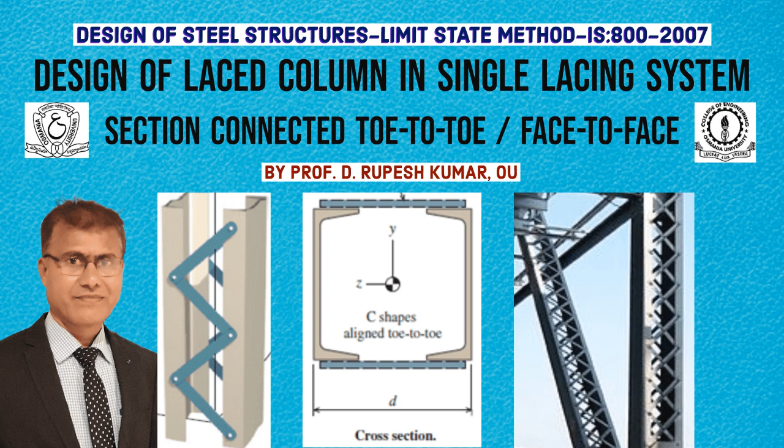In today's class we shall see the design of laced column in single lacing system wherein the sections are connected toe to toe or face to face, and we'll also see a problem on finding out the effective length of a column. In the previous class we saw the design of the laced column system in single lacing system wherein the sections were connected back to back, and also a problem on design of battened column wherein we designed the battening system for the built up column.

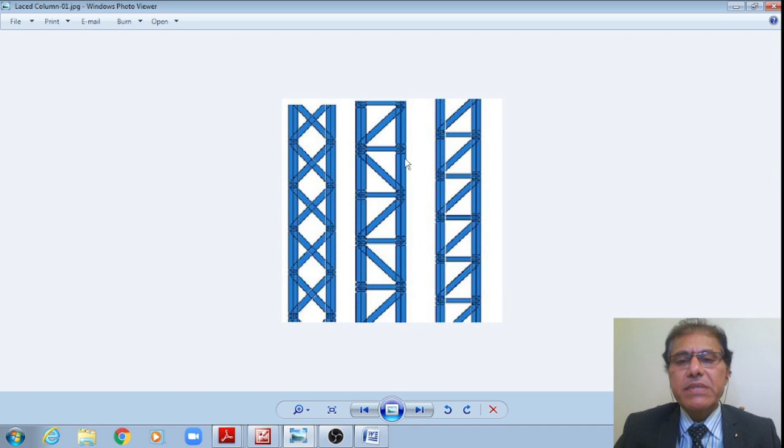Now let us move quickly to the topics we'll be discussing in today's class. The other day we saw a problem on single lacing system wherein the channels were connected back to back, with double and single lacing systems, as you have already examined. That is the problem we discussed the other day, where the channels were back to back and an intersecting single lacing system was designed.

However, in today's class we shall see the design with channels toe to toe, or face to face. This is our toe to toe or face to face configuration. This is the second problem for today. I hope what we are discussing today is now briefly explained.

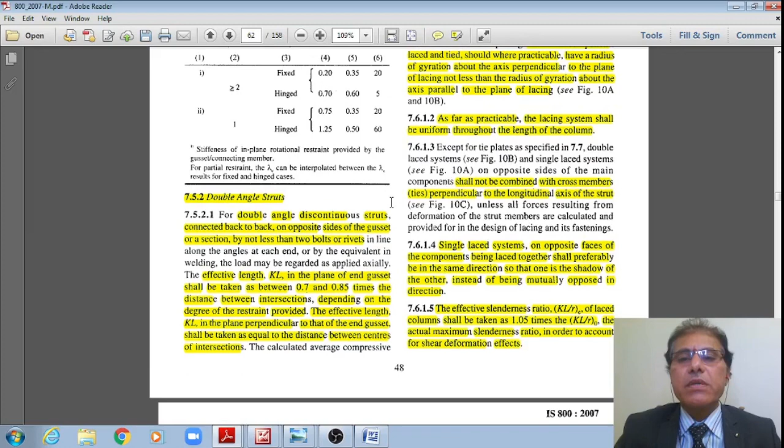Before we go to the actual discussion, let me briefly review the codal specifications of laced columns which I already discussed elaborately the other day. Let me go to page number 45, actually page number 48, of IS 800 2007, for the codal specifications for laced columns. We already discussed this elaborately and exhaustively, you just go through this. However, I'll give it in a nutshell.

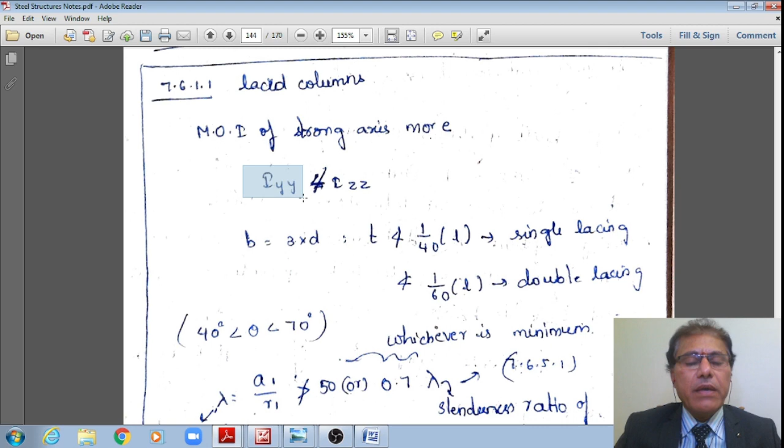In nutshell, the maximum slenderness ratio for these laced columns should be taken as 1.05 times the original slenderness ratio. Also, the moment of inertia about the strong axis IZZ should not be greater than IYY, or in other words, the moment of inertia about the weak axis previously will become the strong axis. Therefore IYY should not be less than IZZ, and similarly RYY should not be less than RZZ. Also, the width of this lacing flat should be 3 times the diameter of the bolt we are using, and the thickness of the lacing system for single lacing system should not be less than 1 by 40th of the length of the single lacing, whereas for double lacing system it should not be less than 1 by 60th of this length of the lacing, therefore this thickness.

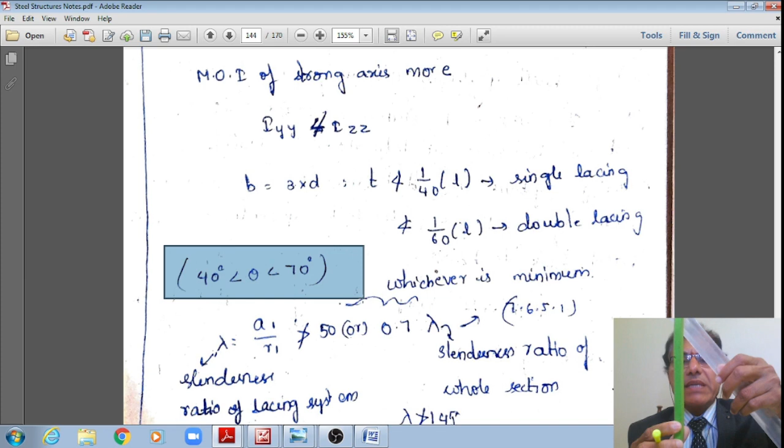This inclination theta with respect to the vertical should be greater than 40 degrees and less than 70 degrees. However, preferably it should be 45 degrees.

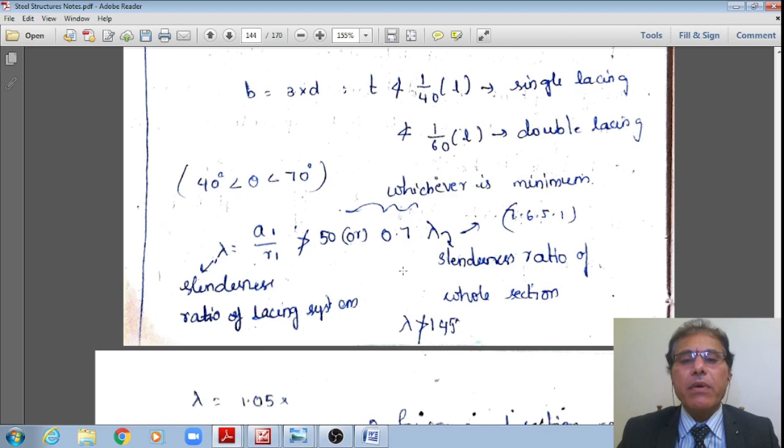The spacing, or pitch of the lacing, should be found such that the slenderness ratio of the lacing system should not be greater than 50, or 0.7 times the slenderness ratio of the entire built-up section as a whole, whichever is minimum, as per the codal specification.

Another codal specification says that the slenderness ratio of the lacing system should not be more than 145. These are the different codal specifications, students. I hope I have covered these in a nutshell. However, for elaborate discussions, you may go to the previous video wherein we have discussed that elaborately.

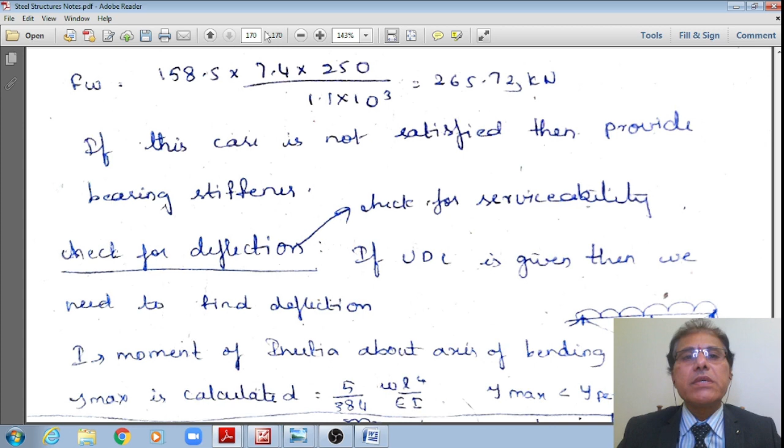Now let us see a numeric problem. I'll just go back to the problem we discussed the other day. This is how the problem we have discussed. Wherein the problem was like this. Just bear for a moment. Yeah, this is the problem.

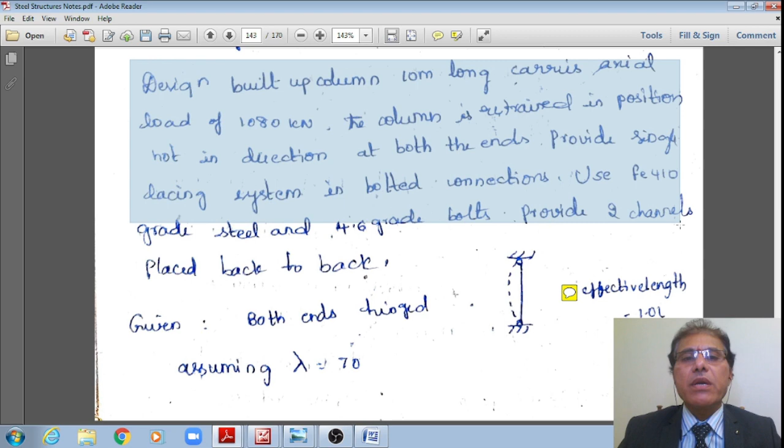Design a built up column 10 meter long, carrying an axial compression force of 1080 kilonewton. However, the column is restrained in position, not in direction, meaning it is hinged at both ends. Provide a single lacing system in bolted connections. Use Fe 410 grade steel and 4.6 grade bolts, meaning ordinary black bolts. Use two channels placed back to back.

Use two channels back to back, that was the previous problem. However, we already designed that. Now in today's class, I'll redesign this problem, wherein the channels are placed toe to toe, or face to face. That is the data given, student.

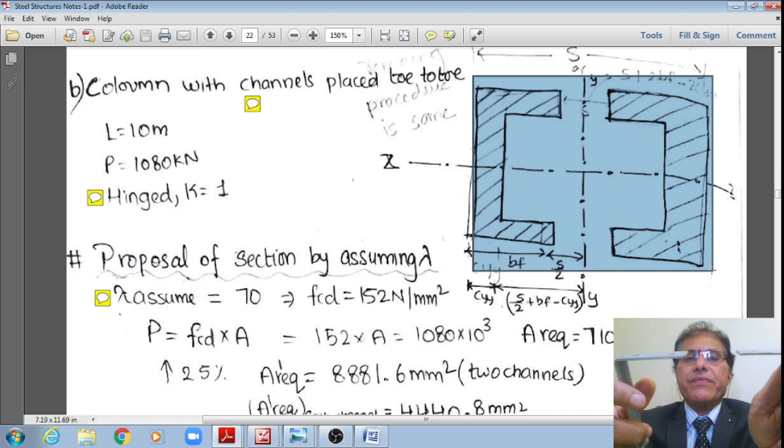Now let me go to the data given and what I need to do. This is how the two channels are facing each other, like I just showed. However, I need to find out the spacing between these two channels which are toe to toe, facing each other. Therefore, now I'll first propose the section.

Hence, if I go to page number 44 of IS 800, student, page 44, yes, 44, table 10, buckling class of the sections. Wherein for this channel, about any axis, the buckling class is C. Therefore I just note down that data: the buckling class is C.

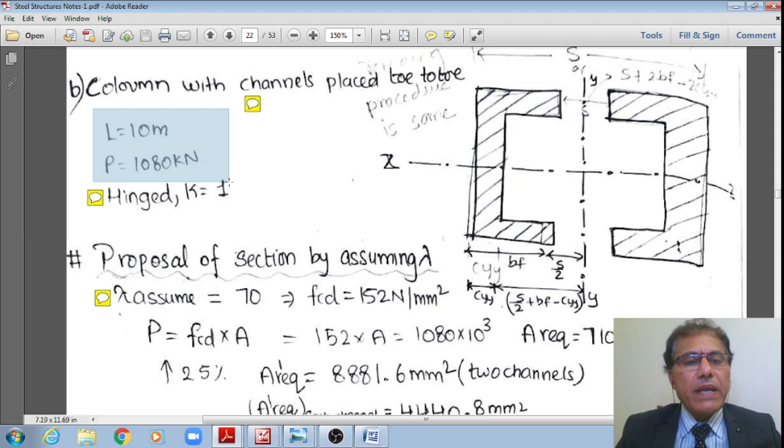For this problem, the given data is the length is given as 10 meter, and the load is given as 1080 kilonewton, already presumed to be factored load, student. This is hinged at both the ends.

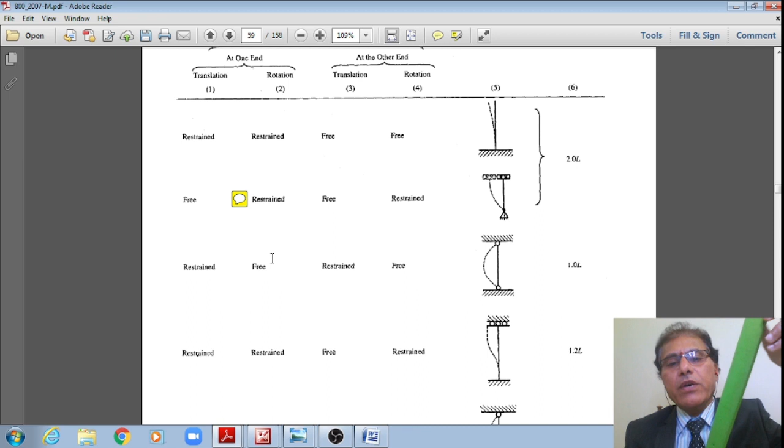Therefore, if I go to table 11 of IS 800:2007, page number 45, next page student, wherein it is restrained in translation and free in rotation at one end as well as at the other end, meaning it is hinged. Therefore, the effective length factor is equal to 1.

The effective length factor is 1, therefore I just note down that. Hence the effective length itself is the unsupported length. Now there is a first subheading, student.

Now what I'll do is propose a trial section for the built-up column like this. Therefore, to start with, keeping into the experience, I am assuming the slenderness ratio as 70.

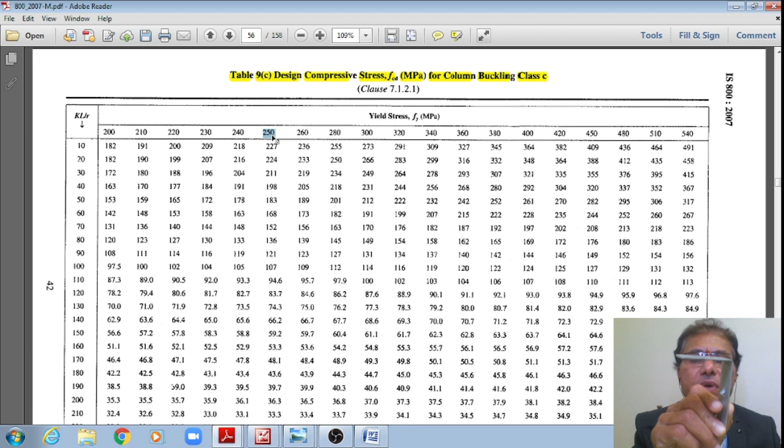Therefore, now what I'll do is go to table 9C. Let me go to page number 42 of IS 800. 9C, page 42, yes, I'm there in 9C. Therefore, for design compressive stress FCD for buckling class C, for Fy equal to 250, because the steel is given as Fe 410 grade steel, for which ultimate stress Fu is equal to 410 and yield stress Fy is equal to 250.

Therefore, for this 250 and for assumed slenderness ratio of lambda equal to 70, FCD, the design compressive stress, is equal to 152. Just noting down that parameter, student.

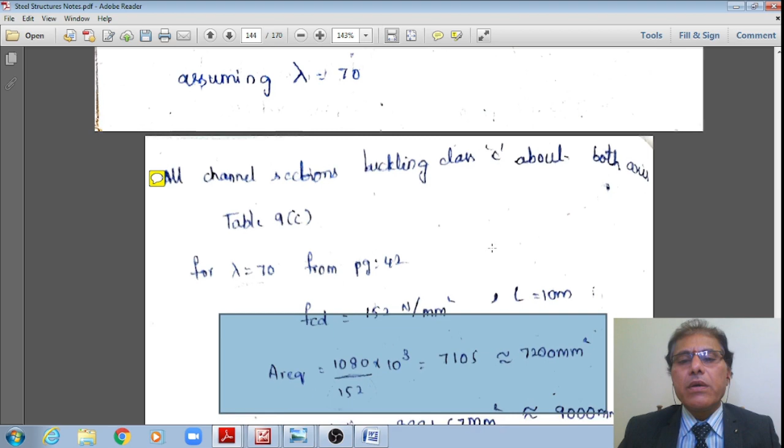Hence, the area required is A equal to 1080 divided by 152, which works out to approximately 7,105. However, for the trial section, since I am fixing a trial section, you increase this area by 25 to 50%.

As a student you may increase by 50%, but now I want to optimize the section, so I am proceeding with 25% extra. Hence it works out to approximately 1.25 multiplied by 7105, giving approximately 8882 mm square, or around 9,000 mm square. So the area obtained is approximately 8882 mm square.

Whereas we are assuming two channels, the area of each channel is approximately 4441 mm square. Therefore, now I'll go to SP 6(1), the Structural Engineering Handbook 1, Table 2, page number 6.

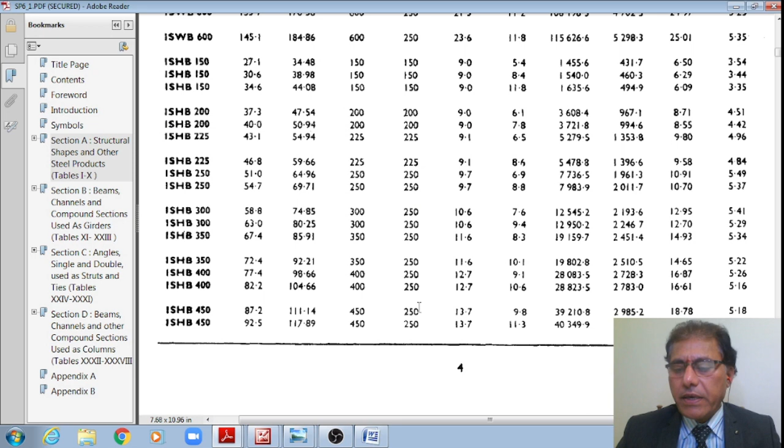From that, now I'll choose. Let me go to that section, student. ISMC 300. Bear for a moment. Therefore, this is ISMC 300.

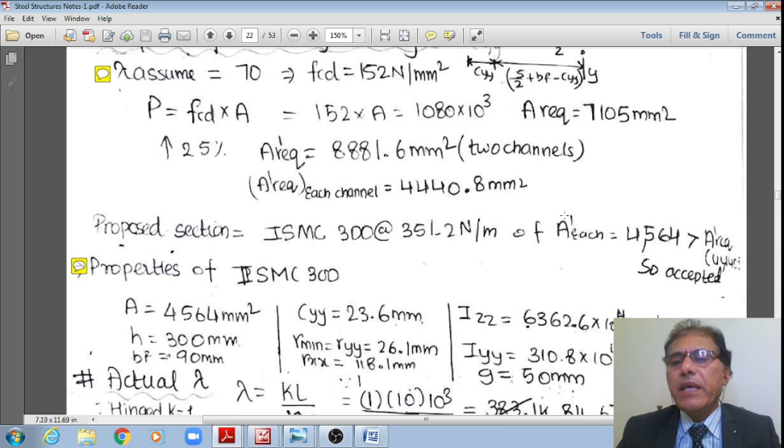I'm choosing this section, student, at the rate of 35.8 kg per meter, for which the area provided for each of the channel sections is equal to 4564 mm square. Even I'll note down the other relevant properties from this same table. This area provided, 4564, is much greater than the trial section area we are targeting, approximately 4441 mm square, so it should be okay.

I'll note down the other relevant properties from the table: area 4564, CYY equal to 23.6, moment of inertia about the major axis 6362.6 times 10 to the power 4, and moment of inertia about the minor axis 310.8 times 10 to the power 4, mm to the power 4. The depth or height of the section is 300 mm, and the width of the flange BF is 90 mm. RYY is equal to 26.1, and RXX is equal to 118.1. Out of these two, for an individual single section, R min is 26.1, and CYY is 23.6. That is the data noted from SP 6(1), page number 6.

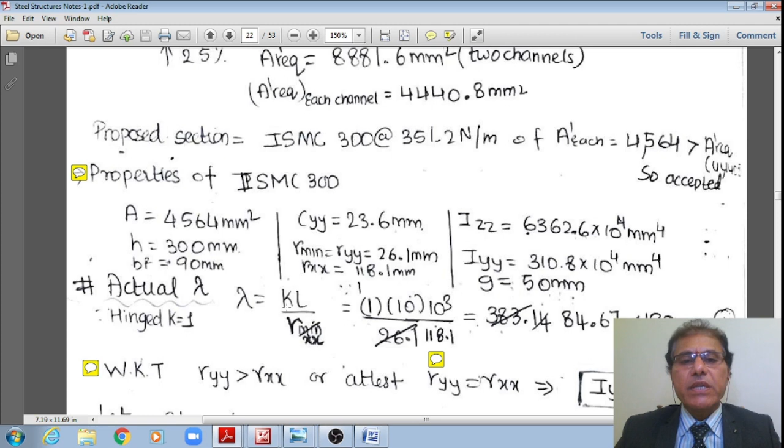Now, once I know this data, I'll proceed with further calculations. How now I want to find out this spacing, so what should be that spacing? However, the code says that for obtaining that spacing, I need to proceed like this.

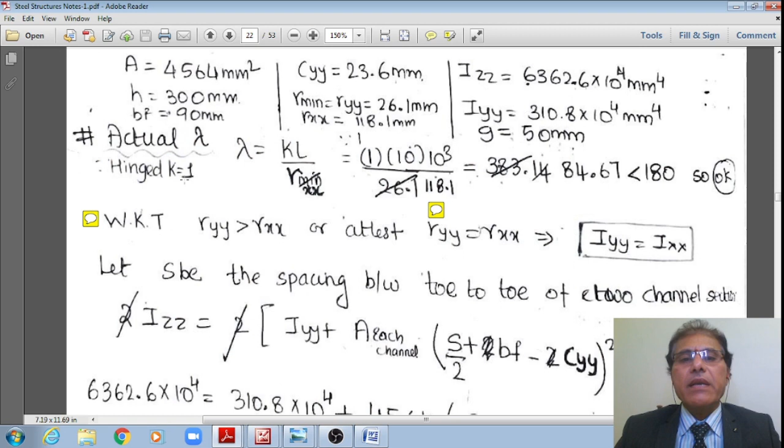Therefore, let me see this. Now, let us see this. The actual slenderness ratio of this built-up column is equal to KL by R. However, KL is equal to 10 meter, 10,000 mm, divided by R. However, please see that R min for the built-up section,

as per the discussion, we have seen that IYY shall not be less than IZZ, meaning RYY shall not be less than RZZ. Therefore, RZZ itself, RXX itself, is the minimum radius of gyration. Therefore, for the built-up section, RXX will be the minimum. However, for the built-up section, RYY will not be 26.1 because it is spaced at some distance apart; it will be maintained such that it is just greater than 118.1 or just greater than RXX.

Hence, for the built-up section, RXX is minimum. Hence, if I divide with that 118.1, not 26.1, please make a note, student. I will show that it is crossed out - no, don't do that. Using 118.1, it works out for the built-up section that the slenderness ratio is equal to 84.67, which is less than 180, so it is okay.

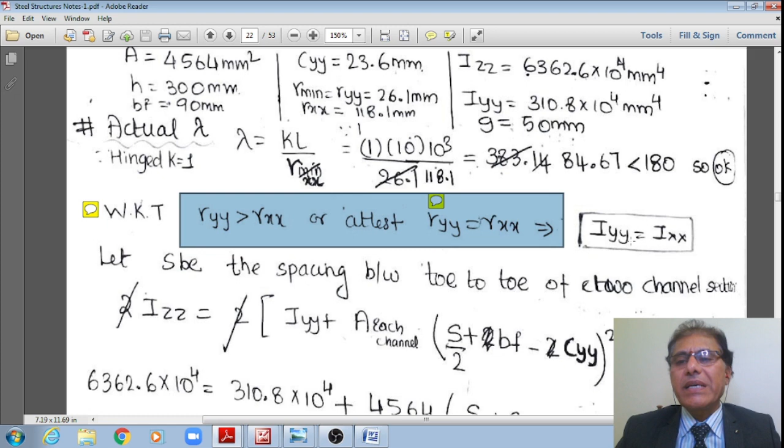Now, however, I want to find out - just now we have discussed that RYY should be greater than RXX and IYY should be greater than IXX. Therefore, I want to find out the spacing S between these two channels. Let S be the spacing between these two channels, which is the clear spacing, in terms of mm, which is the distance between the toe to toe of these two channels.

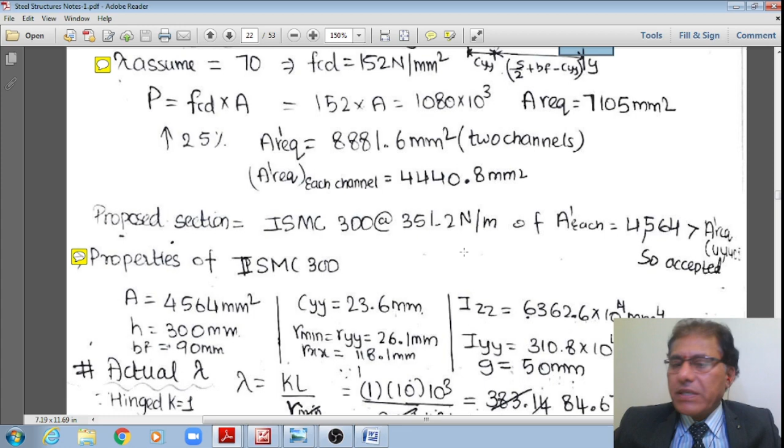I want to find out the spacing S using this condition that IYY should be greater than or equal to IXX. Therefore, if that is the case, the moment of inertia about the major axis for the built-up section equals 2 multiplied by IZZ, using the parallel axis theorem. The moment of inertia about the YY axis, the weak axis, equals 2 multiplied by IYY plus area of each channel multiplied by S by 2.

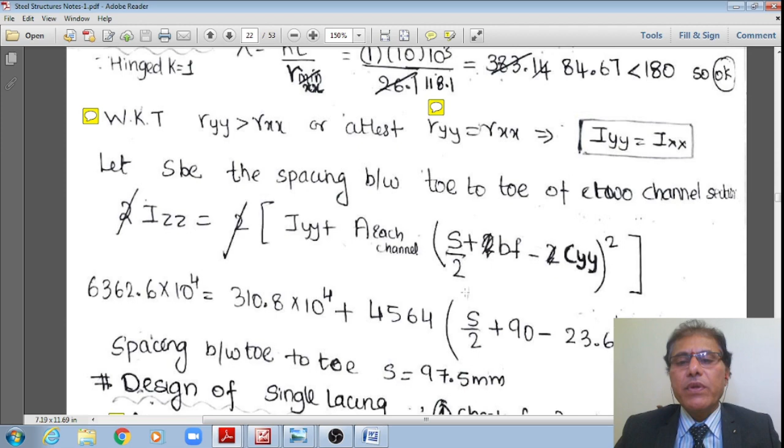S by 2 plus BF minus CYY, whole square. That is how the moment of inertia about this centroidal vertical axis is transferred to the centroidal axis for each of this column. Therefore, for two columns.

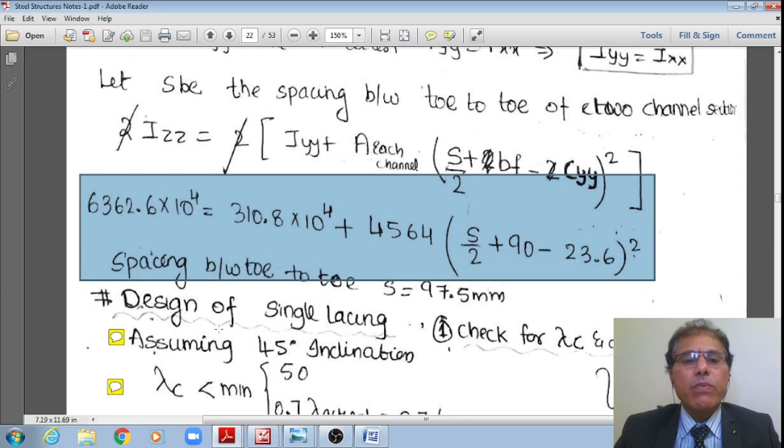Therefore outside 2, substituting the numeric values, the 2 gets cancelled. Hence substituting the numeric values, now I have 6362.6 times 10 to the power 4 equals 310.8 times 10 to the power 4 plus 4564 multiplied by S by 2 plus 90 minus 23.6, whole square. Solving which, I get the spacing.

Between these toe to toe is equal to 97.5. Now let us see this spacing. Now let me go to the further calculation.

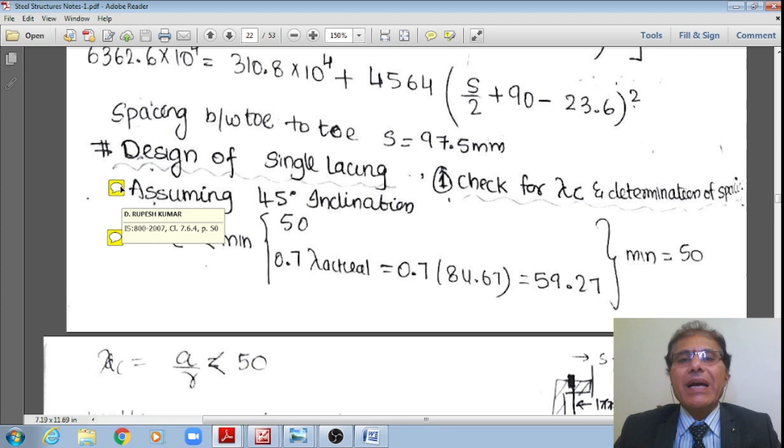Once I do this, now I want to design this single lacing. For that, assume the inclination of this lacing as 45 degrees.

As per clause 7.6.5.1, page number 50, we have seen that the slenderness ratio should be the minimum of 50 or 0.7 times the actual slenderness ratio. We already calculated 0.7 multiplied by 84.67, which works out to 59.27. Out of these two, the minimum is 50 only. Therefore it is okay.

Furthermore, now I want to find out the spacing. Therefore, the distance between the bolts, these two bolts, is this one. This distance equals, from this schematic, S plus 2 multiplied by BF minus G, because this distance is G from the steel tables.

Substituting the numeric values, S is already obtained as 97.5, plus 2 multiplied by the breadth of the flange, which is 90, minus this gauge distance from steel tables, which we noted down as 50. It works out to 177.5, which is the distance between the CG of the bolts to the CG of this bolt.

Now, once I get that distance, this is what I am drawing, that has 177.5. And now, however, the spacing should be obtained in such a fashion that A by R should be less than 50.

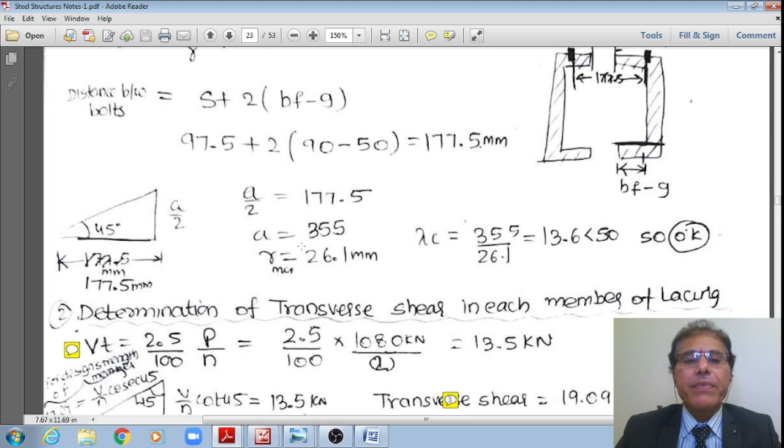355 mm. However, the radius of gyration for each individual channel equals 26.1. Therefore, if I check that, the slenderness ratio A by R equals 355 divided by, for individual channel, 26.1. Therefore, for this lacing system, the slenderness ratio equals 13.6, which is less than 50.

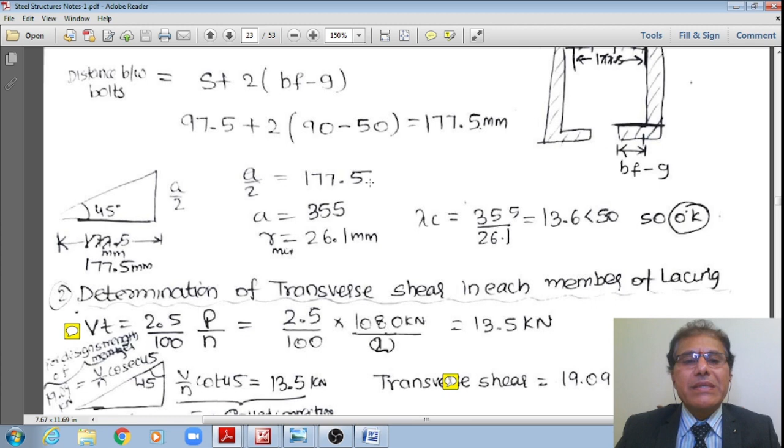Therefore okay, for this single lacing system it is okay. Once it is okay, now what I'll do is I'll further proceed with the design. Therefore I want to fix the section.

I want to fix the section. Hence now I'm determining the transverse shear in each of these members of the lacing. Therefore I'm calculating the design forces.

If I go to clause 7.6.6.1, page number 50, let me go to that page number 50 of IS 800. Yes, I am there on page number 50.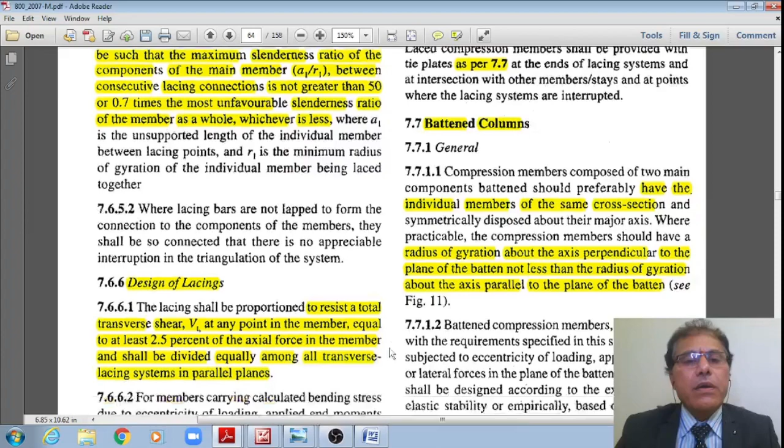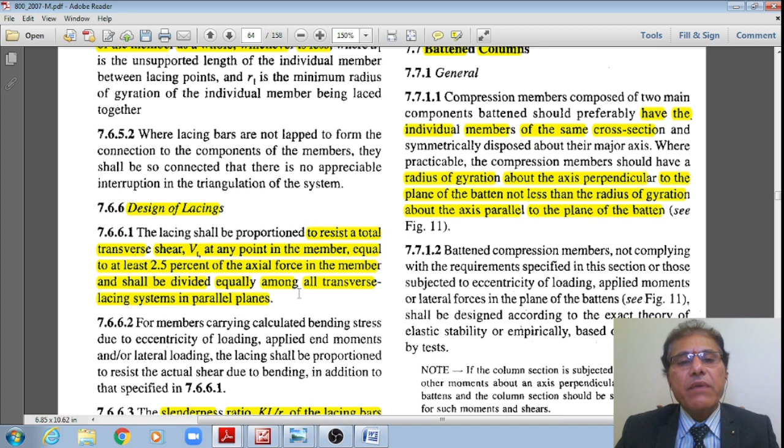As per this clause, code 7.6.6.1 says that the lacing shall be proportioned to resist a total transverse force Vt at any given member equal to 2.5% of the axial force in the member, and it should be divided equally among all the transverse members.

I do have N equal to 2. Just now I obtained this spacing A equal to 355, because this was A by 2, and this spacing was some 177. Therefore, this is how N is equal to 2. Two lacings back to back.

Therefore, that divided by 2 works out as Vt, transverse shear, acting in the horizontal direction, which is equal to 13.5 kilonewton. Now I have this transverse shear, 13.5, and here this is 45 degree.

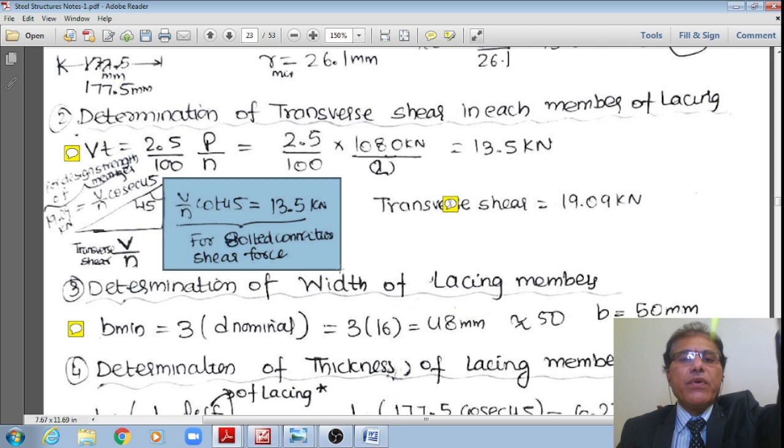Therefore, if I take, from this triangle, for bolt design, the vertical force due to this 13.5 kilonewton is equal to V by N cot 45. That I'll get as the shear force acting on the bolt system.

Once again, that works out because of this 45 degree, even the shear force on the bolt will also work out same 13.5 acting in the downward direction. Not only the transverse shear, also vertical shear works out as 13.5.

However, now I am interested in what is the design force in the lacing system, or the design compression force in the lacing system. From this schematic, we can say that the design force, once I know this as V by N, P by N.

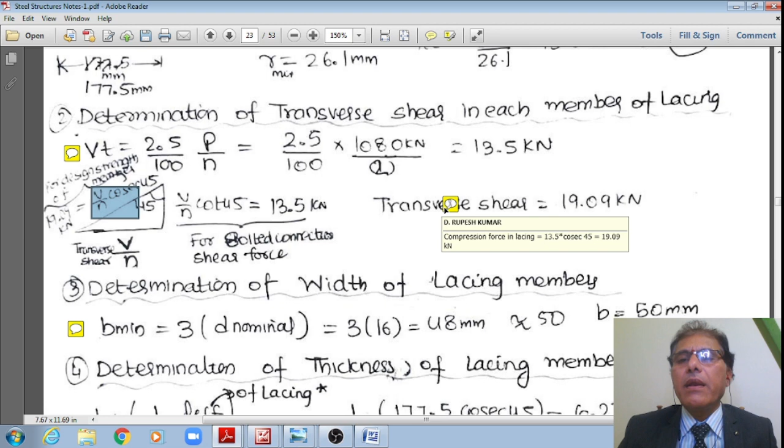By taking this, I'll get this design force in the lacing system as Vt by N, which is equal to 13.5 multiplied by cosecant 45. That multiplied by cosecant 45 works out to 19.09, so the compression force in the lacing is equal to 19.09.

19.09 kilonewton. Also, under reversal of stresses, it will also carry the same tension force, 19.09 under reversal of stresses cases. Now, once I decide the design forces, let me go to the fixing of the size. Next subheading is how to fix the size.

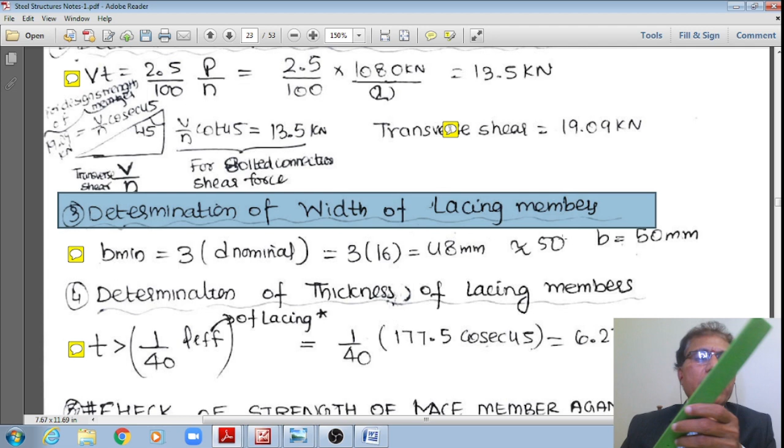Within that, the first subheading is determination of the width of the lacing member. As per clause 7.6.2, page number 50, 762, let me go to this page number 50, 762.

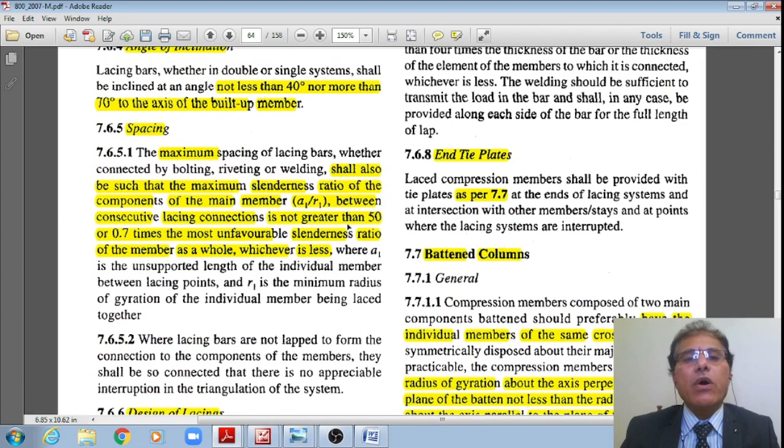Now I do have the core size. This you already seen, even this angle also we have seen. Yes, this one, 762, width of the lacing.

Minimum width of the lacing shall be 3 times the nominal diameter of the end bolt or rivet, and the thickness of the lacing shall not be less than 1/40th of its effective length for single lacing system. If I am recalling these two codal specifications and substituting the numeric values here.

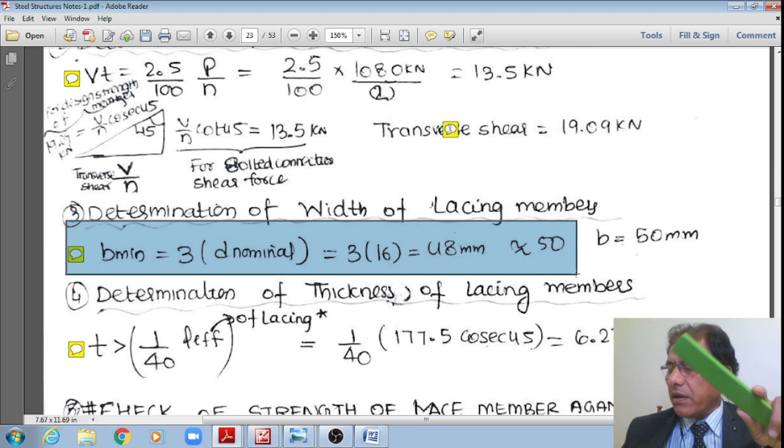The minimum width B minimum is equal to 3 times nominal diameter. However, I am assuming the use of 16 mm nominal diameter bolts. Therefore, 3 multiplied by 16 is equal to 48, so I will say 50 mm is the width. I am assuming as 50 mm, not less than means 50 mm.

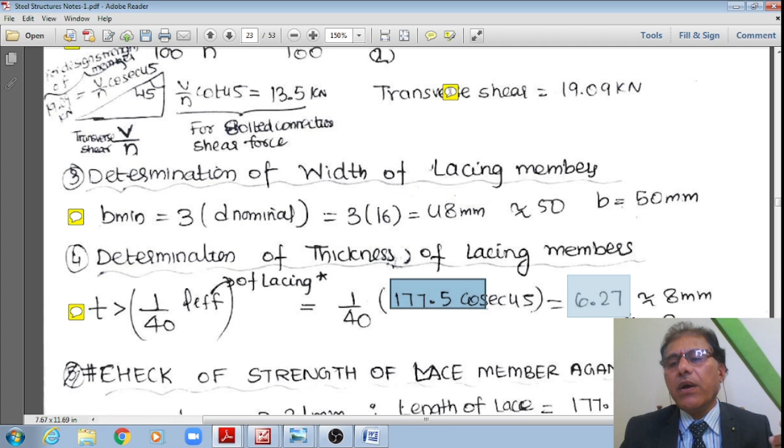Also the thickness, as per this, should be not less than 1/40th of this effective length. The length of this lacing system is equal to square root of 177.5 squared plus square root of 177.5 squared. Upon substitution, 1/40th of that value works out to 6.27. However, the thickness next available is 8 mm.

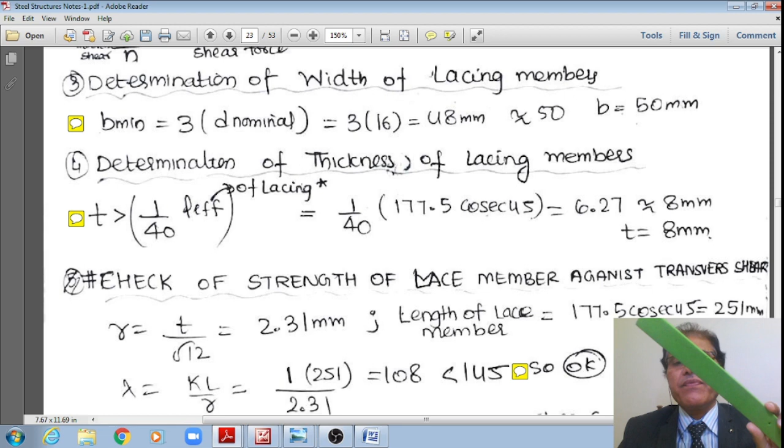Therefore R say 8 mm, right? Then, therefore, now I am fixing the section as 50 ISF 8. If I go to Indian Standard Flats, 50 ISF 8 is available, that section is available, right? Therefore, I am fixing that as my lacing system.

Now, once I fix this lacing system section, the next subheading is that I want to check the adequacy of the member against the applied design forces. Is it going to carry the compression force as well as the transverse shear or not? That I'll check.

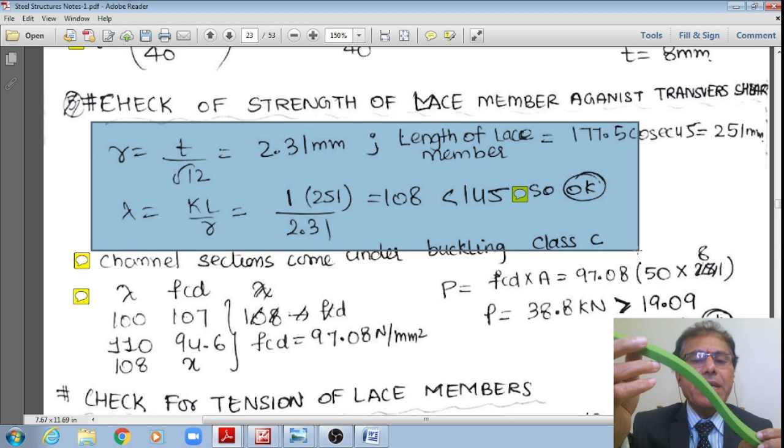Because under compression it is buckling, means bending, therefore the minimum radius of gyration is about the weak axis. That now works out T by root 12, because that is equal to square root of I divided by A, whereas I is equal to BT cubed by 12, whereas area is equal to BT. Therefore BT gets cancelled, therefore square root of T square divided by 12 will work out T divided by under root 12. Therefore thickness is already 8 mm.

Therefore 8 divided by square root of 12 works out, say, the minimum radius of gyration of this compression lacing, which is acting as a compression member, is 2.31.

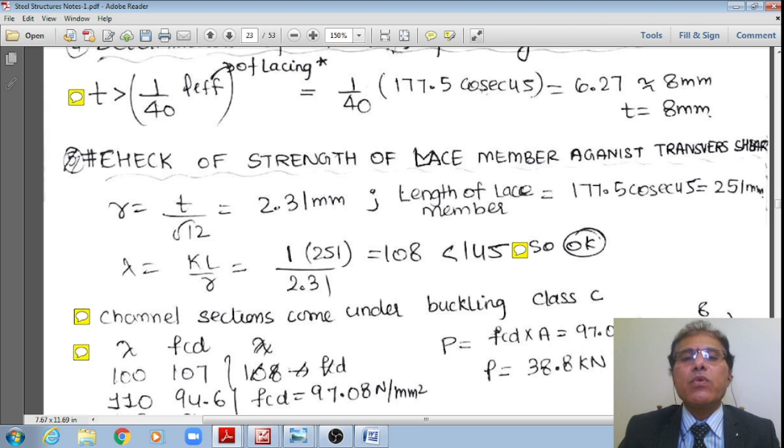And also the length of this lacing system, just now we have obtained as square root of 2 multiplied by 177.5 whole square, that works out say 251, right? That 251 divided by 40 itself worked out 6.27 as the thickness, right?

And now using this, I'll get the slenderness ratio is equal to KL. However, that length is equal to 251, and I'm assuming that both ends are hinged. Hinged, not more than one bolt, therefore effective length factor K is equal to 1. Therefore in such case I can assume not more than one bolt means hinged. Therefore 1 multiplied by 251 is the actual length, or between center to center of the bolts.

That is 251 divided by R min. R min is equal to 2.31. It works out say 108 as the slenderness ratio, which is less than 145 as per clause 7.6.6.3.

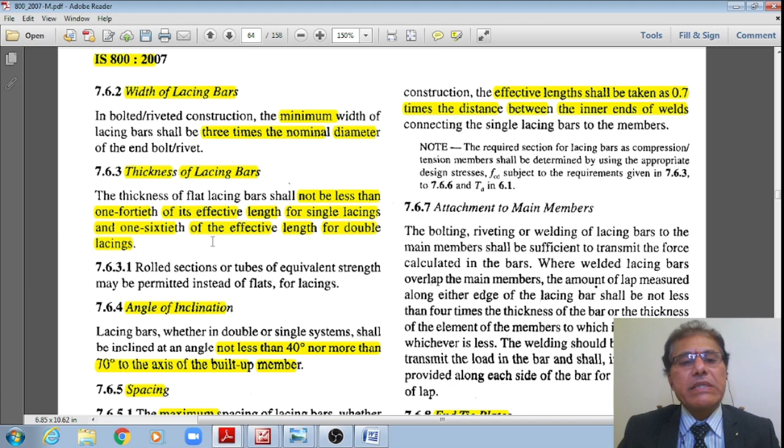Now let me go to that clause 7.6.6.3. Yes, as per this, now you can see - this one, right - the slenderness ratio of the lacing flat shall not exceed 145. This we already seen the other one, right, 0.7 times that for double lacing. Therefore it is less than 145.

Therefore, okay, this section is okay, this proposed section is okay from the buckling point of view, or from compression point of view. However, I'll also calculate what is the load carrying capacity of this section. Hence this section is a channel section, therefore which is buckling class C.

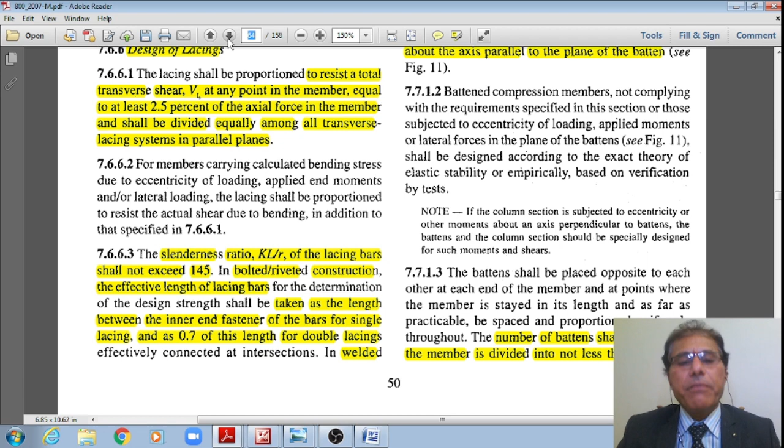Hence from this table 9C, page number 42, now I have to check this slenderness ratio of 108. Let me go to that page number 42. Yes, I am there in that table 9C.

Therefore now my slenderness ratio is worked out as 108. Therefore what now I'll do is I'll note down the value of FCD for slenderness ratio 100, which is 107. And also the next value for slenderness ratio of 110, the FCD is equal to 94.6, from this table, for Fy equal to 250. Therefore I have noted down these two values.

Therefore now in between I'll interpolate. Upon interpolation I'll get this design compressive stress as 107 minus 94.6 divided by 10, multiplied by 8. It works out say 97.08 Newton per mm square.

Therefore the load carrying capacity of this lacing system is equal to effective area, 50 multiplied by 8, multiplied by FCD which is 97.08, that divided by 10 to the power 3. It works out say 38.8 kilonewton, which is much greater than the design forces we already obtained.

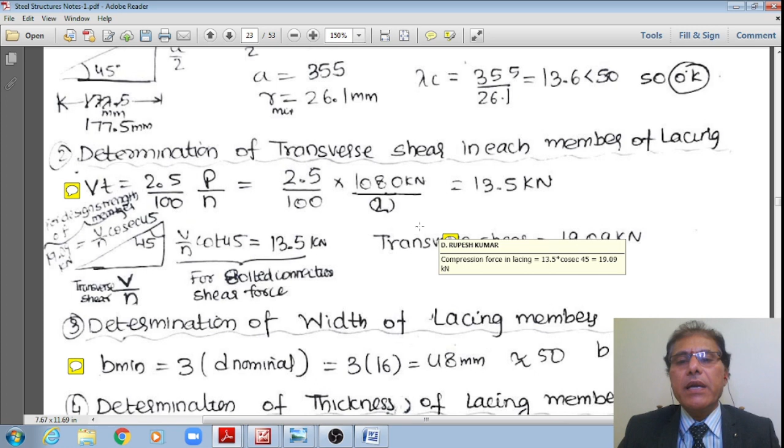Therefore that is how the compression force in the lacing system is equal to 19.09. Under reversal of stresses cases, the same is the tension.

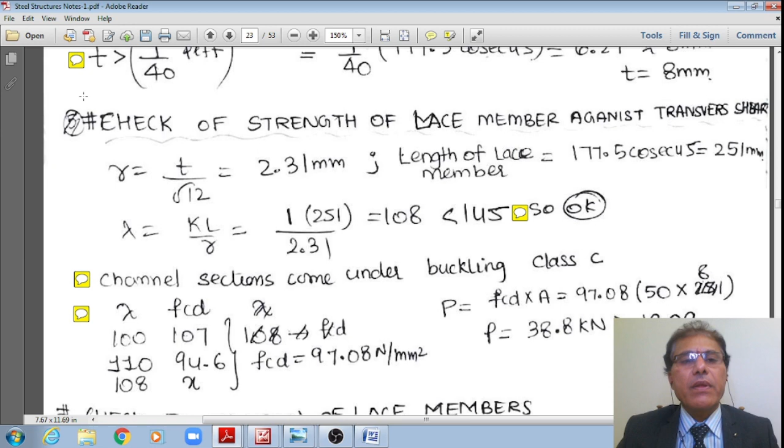Therefore, 38.8 is much greater than 19.09 kilonewton. Therefore it is okay, meaning the section is adequate to take the compression force.

However, whether it can take this much tension under reversal of stresses cases or not, I also need to check. Hence the next step is checking the adequacy of the section to take the tension force in the lacing system, the lacing flat.

Indian standard flat. Let me go to clause 6.2, page number 32 of IS 800, right?

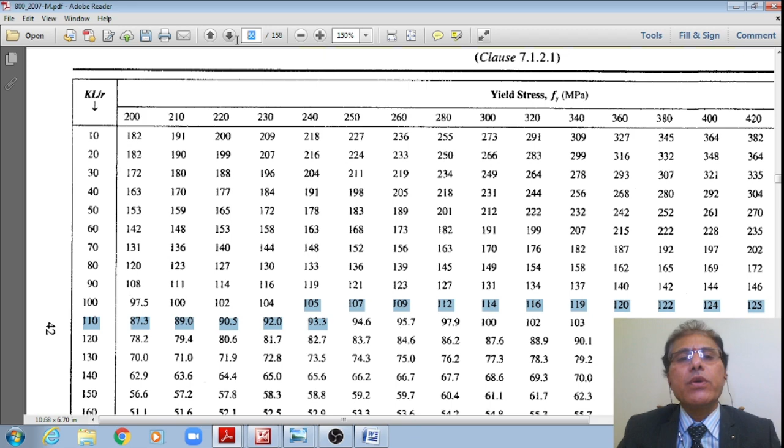In the design of tension members, T must be less than TD, where TD is the lowest of three values.

One, design strength due to yielding of the gross cross section, TDG. Two, rupture of the critical section, TDN. Third, block shear, TDB. However, block shear criteria will not come into picture here, so it is the least of the two.

As per clause 6.2, design strength due to yielding of the gross cross section, TDG, equals AG Fy divided by gamma m naught. The second criteria is design strength due to rupture of the critical section of the plate — this Indian standard flat is treated as a plate — so TDN equals 0.9 AN Fu divided by gamma m1.

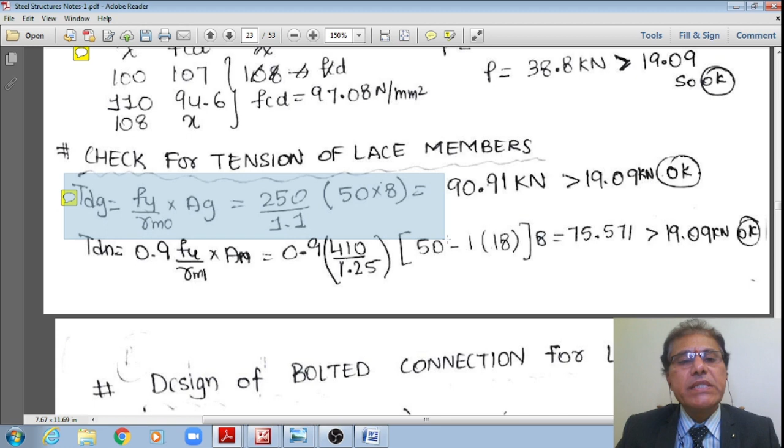As per these two codal specifications, I calculate first the yielding of the gross cross section, TDG equals Fy divided by gamma m naught, AG. For the steel, Fy equals 250 divided by 1.1, and the gross area of this lacing flat is 50 multiplied by 8, divided by 10 to the power 3. It works out to 90.91 kilonewton in gross cross section yielding, which is much greater than 19.09 kilonewton.

Now, also because we are providing one bolt hole like this, the area at this hole over the width of 50 will reduce by one hole.

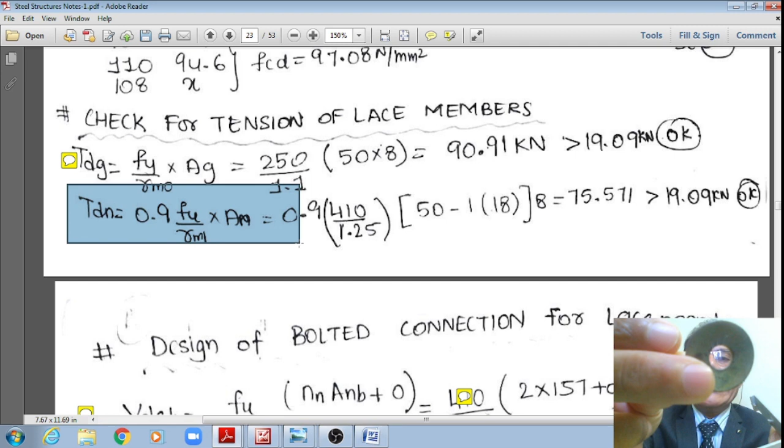As per this, for a 16 mm diameter bolt, the increase in hole diameter is 2 mm. Therefore 16 plus 2 equals 18. Now the effective width is 50 minus 18, one diameter of the hole, and that is the effective width, multiplied by its thickness of 8.

Therefore that is the net area, multiplied by 0.9 times Fu, 410, divided by 1.25, divided by 10 to the power 3. It works out to 75.57, which is also greater than 19.

However, the tension capacity is the least of these two. Therefore the least of these two, 75.57, is the tension capacity of this lacing system or lacing flat, Indian standard flat.

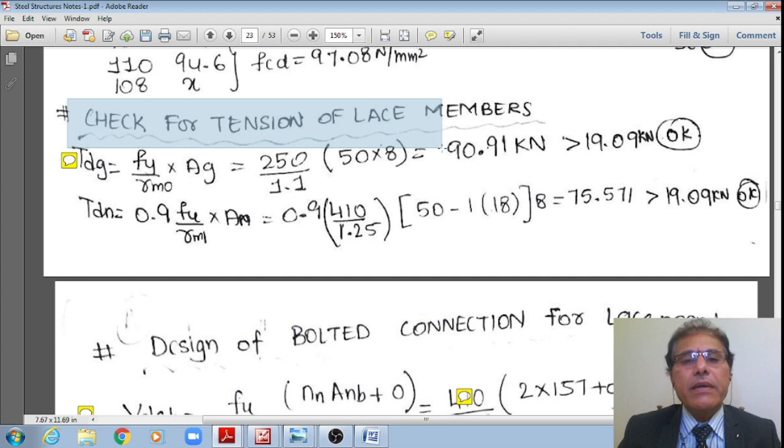Therefore, 75.57 tension capacity is much more than what's needed, since under reversal of stresses cases only 19.09 kilonewton can be expected. Therefore it is okay — it can take 19.09 kilonewton compression as well as tension. Hence my final section is 50 ISF, Indian standard flat 8, as the final section for the single lacing system.

Now, once I conclude that, let me go to the next subheading: the design of the bolted connections for this built-up section with single lacing system.

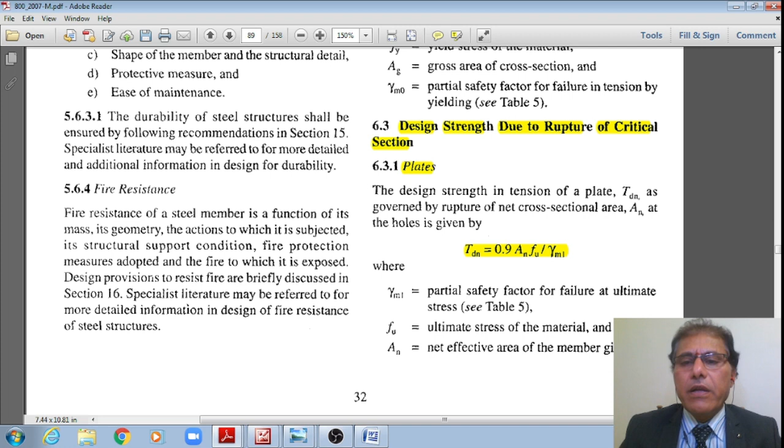Let me go to clause 10.3.3, page number 75. Let me visit that page. Yes, therefore I am there in the bolted connections section as per IS 800 2007, clause 10.3.3.

Shear capacity of the bolt, VDSB, equals VNSB divided by gamma MB, where VNSB equals Fu divided by root 3, Nn multiplied by Anb.

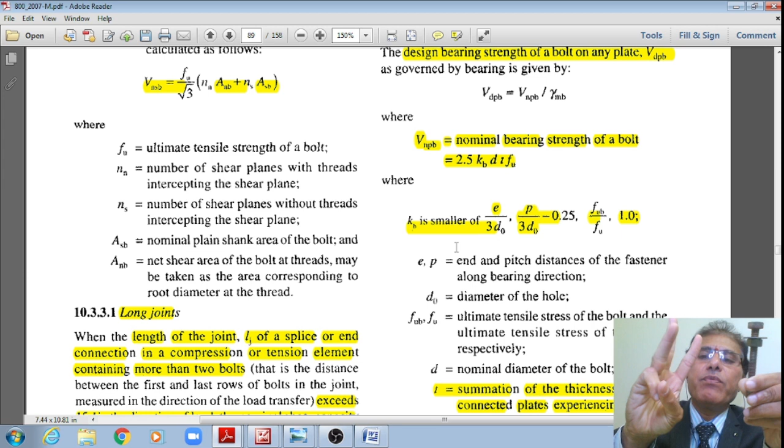The second one is the bearing capacity of the bolt, VDPB equals VNPB divided by gamma MB, where VNPB, the nominal bearing strength of the bolt, equals 2.5 kb dt Fu, where kb is the least of four values: one, e divided by 3D naught; two, p divided by 3D naught minus 0.25; three, FUB divided by Fu; and four, 1. Now let me substitute into these at a quicker pace.

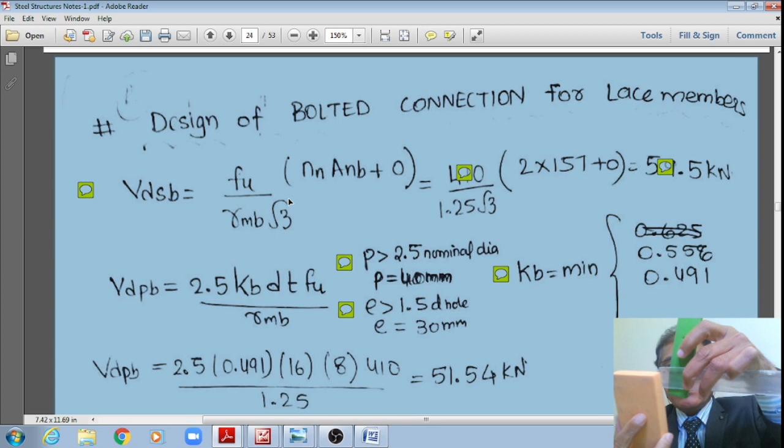Therefore, the design shear strength of this bolt — you please see that we are providing an overlapping lacing system, like this. Therefore these are under double shear, because one shear plane is between the two lacing overlappings, and one more shear plane is with the section. Therefore it is under double shear.

Therefore Nn is equal to 2.

Let me show this in the schematic. I'm providing an overlapping like this. Here one shear plane, and between these two Indian standard flats, there's one, and one more is there between this Indian standard flat and the channel section. Therefore it is under double shear. Once you understood that, I hope you understood that. Therefore nn is equal to 2.

Substituting the numeric values, now I get this result as 400 divided by 1.25 divided by root 3, multiplied by 2, multiplied by 157. It works out so a value of 58.01 kilonewton in double shear.

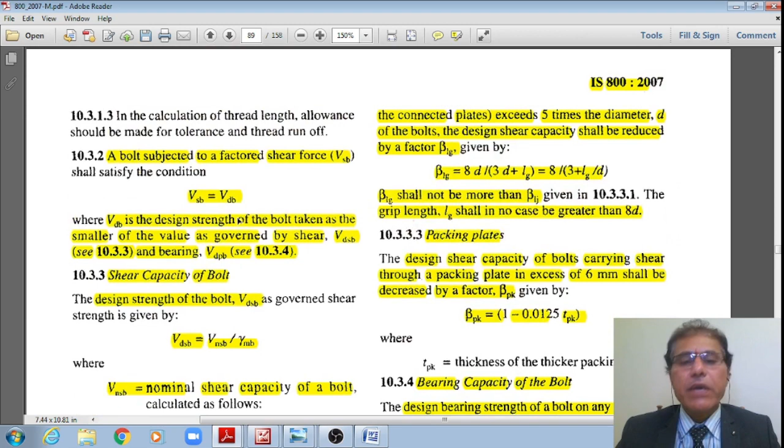However, if I want to calculate the strength of the bolt in bearing, then I need to find out what is the pitch. As per clause 10.2.2, page number 73, let me go to that page and revisit it at a quicker pace. The minimum pitch as per this shall not be less than 2.5 times the nominal diameter.

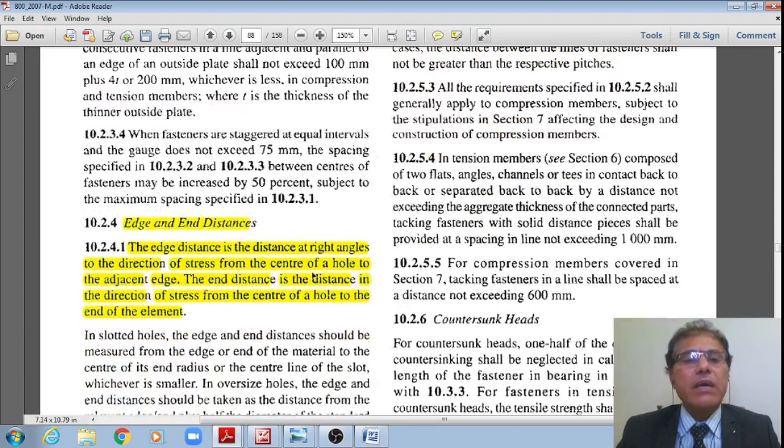This 2 mm extra clearance we already saw from table 2, and the maximum spacing for the compression member should not be more than 12 times T or 200 mm, whichever is minimum. As well as from clause 10.2.4, the minimum edge distance shall be 1.5 times the hole diameter if the holes are made with machine flame cut, sawn, or planed edges. Generally we will be assuming machine cut or machine punching.

If I use this data, the pitch should be greater than 2.5 times the nominal diameter. It works out to 2.5 multiplied by 16, which gives 40 mm. Also, edge distance should be 1.5 times the hole diameter. The diameter of the hole is equal to 18, so 1.5 multiplied by 18 is equal to 27 mm, so I'll take the edge distance as 30 mm. So edge distance equals 30 mm and pitch equals 40 mm. These are my assumptions.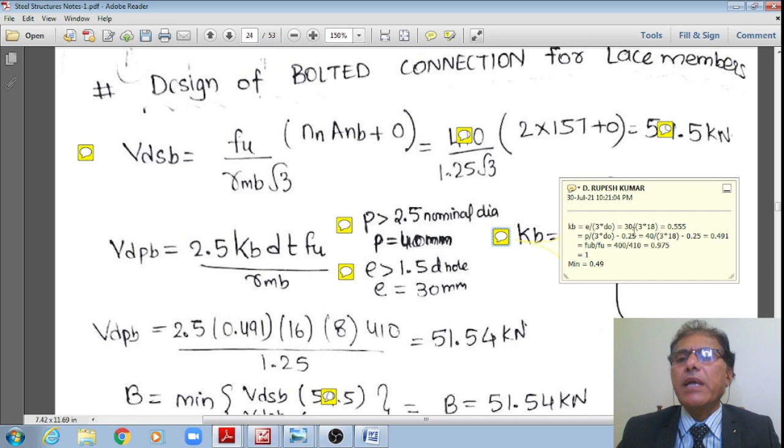For these assumptions, now I'll calculate KB. E divided by 3D naught works out, upon substitution, to 30 divided by 3 multiplied by 18, giving 0.55. The second criteria, P divided by 3D naught minus 0.25, is equal to 40 divided by 3 multiplied by 18 minus 0.25, equal to 0.491. The third criteria, FUB divided by FU, is equal to 400 divided by 410, equal to 0.975. And the fourth one is 1. Out of all these, the second one, 0.491, is the least, approximately 0.49.

Therefore KB - now I'll substitute those values to find the bearing capacity of the bolt in bearing criteria. It is equal to 2.5 multiplied by 0.491 multiplied by 16, the diameter of the bolt. Now let us see what is the thickness of this connection for bearing. You please see that here I have the thickness for bearing.

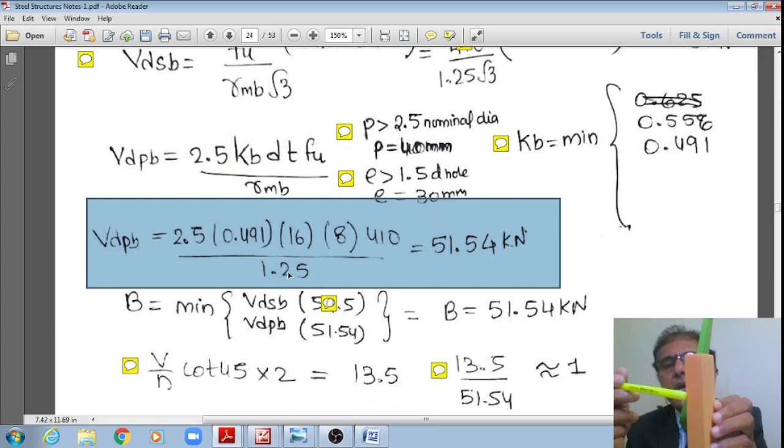Thickness of the bearing: the Indian standard flat is 8 mm, connected to another 8 mm, which is connected to the flange thickness TF of the channel. Out of these, the flange thickness of the channel is much greater than this 8 mm, so this 8 mm flat, the Indian standard flat, will fail first. Therefore 8 mm is the thickness for bearing. So 16 multiplied by 8 multiplied by 410 divided by 1.25 divided by 10 to the power 3, it works out to 51.54.

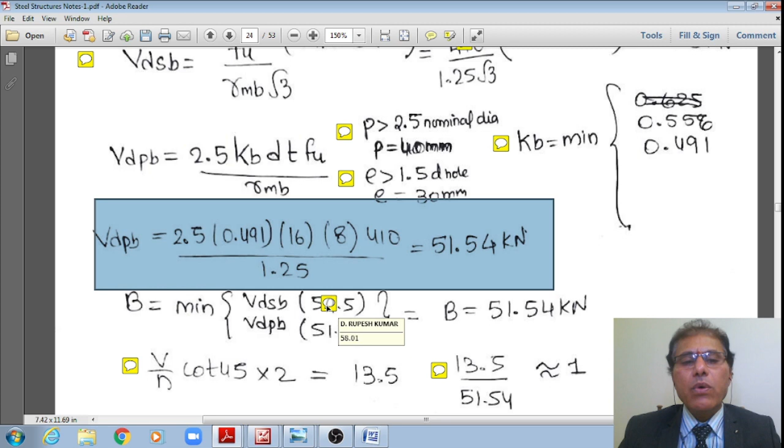Therefore, the next subheading is bolt value, which is the minimum of these two values. The first one is 58.01, the next one is 51.54. Therefore 51.54 is the minimum value.

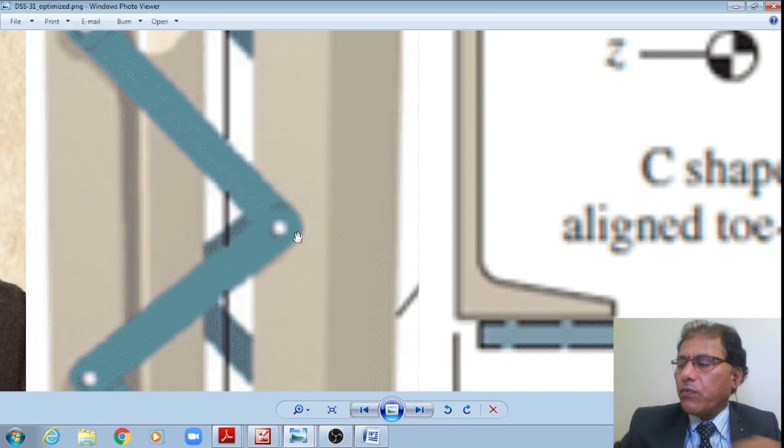Once I get this, I want to get the number of bolts. Let us see the force in the intersecting bolts. Let me show this. In the intersecting bolts, here, one force is 13.5, and also another 13.5. Therefore this bolt is under the action of 13.5 plus 13.5, that is, under the shearing action of the summation of two 13.5s, equal to 27. Please make a note, student: if only single lacing is provided, only 13.5.

However, at the same time, for intersecting lacing, if it is non-intersecting lacing it is only 13.5. But since this is intersecting lacing, it is 13.5 plus 13.5, which is equal to 27.

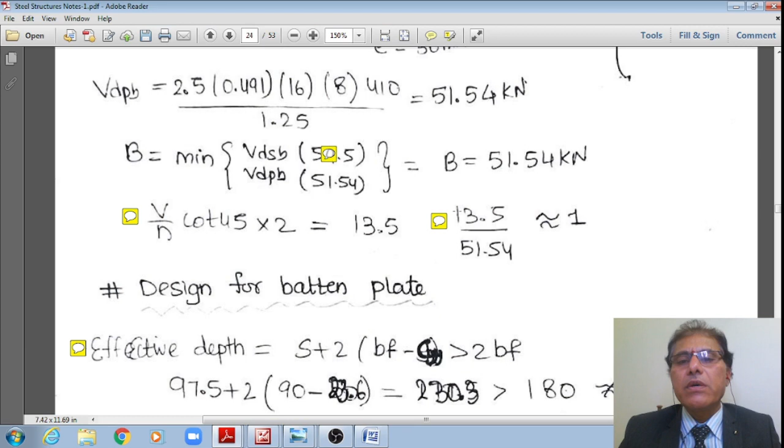Hence, the number of bolts that we need to provide is equal to total force divided by bolt value. Total force is 27, divided by the bolt value, which works out to 51.54.

Therefore, it is less than 1, or say approximately 1. We already assumed that we are going to provide only one bolt, because of which the effective length factor for this lacing system was 1. Therefore that is true, my assumption was correct.

Therefore, that is how the design is now fixed for the lacing. However, we also need to design a batten plate at the end, like this. At the end a batten plate is also required, student. You may be seeing a batten plate at the end, right?

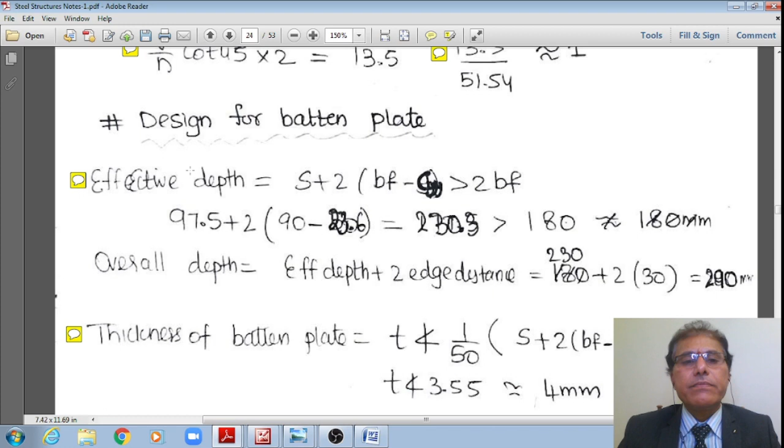How this batten plate needs to be designed, you already saw in the previous video, so please see it elaborately. As per clause 7.7.2.3, page number 51, let me go to that page, student. Yes, I am there on page number 51.

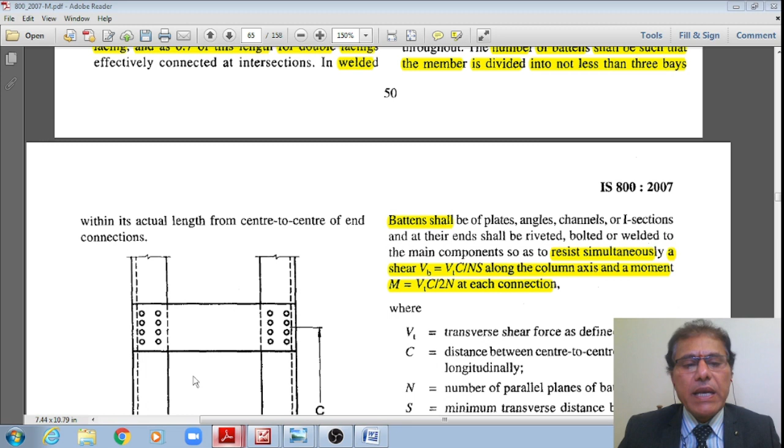As per this clause, now I have the effective depth, 7723. Just bear for a minute. 7723, yes, this is that size.

The batten shall have an effective depth not less than the perpendicular distance between the centroids of the main members. However, for intermediate battens, this is not less than 3/4 of this distance. Now let us examine this, effective depth is calculated as S from this figure, S plus 2 multiplied by BF minus CYY. The code says it should be greater than 2 times the width of the flange.

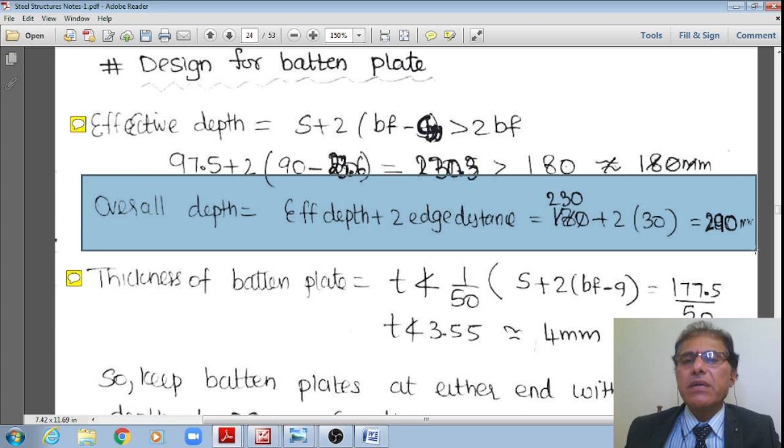Upon substitution, 97.5 plus 2 multiplied by 90 minus 23.6, it works out to approximately 230.5. However, 2 multiplied by width of flange, 90, equals 180. Since 230.5 is greater than 180, it is okay. Hence the overall depth is equal to the effective depth plus two edge distances, 30 plus 30. So 230 plus 60 works out to approximately 290.

From the same clause 7.7.2.3, let me go to that. Even the code says the thickness of the batten or tie plate - actually this is the tie plate - should not be less than 1/50th of the distance between the innermost connecting lines of the rivets. Substituting into this, thickness should not be less than 1/50th of the innermost distance between rivets, which is S plus 2 multiplied by BF minus G. Substituting, I get the result as approximately 177.5.

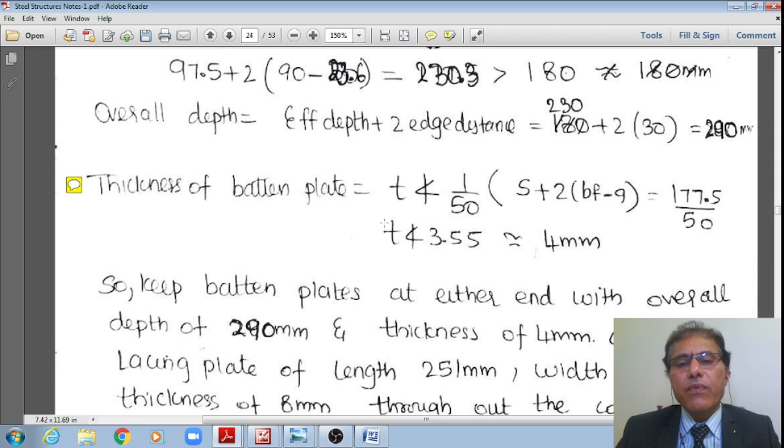We already calculated this in the previous subheading. That divided by 50 gives not less than 3.55, or say 4, because 4mm thickness batten plates are available.

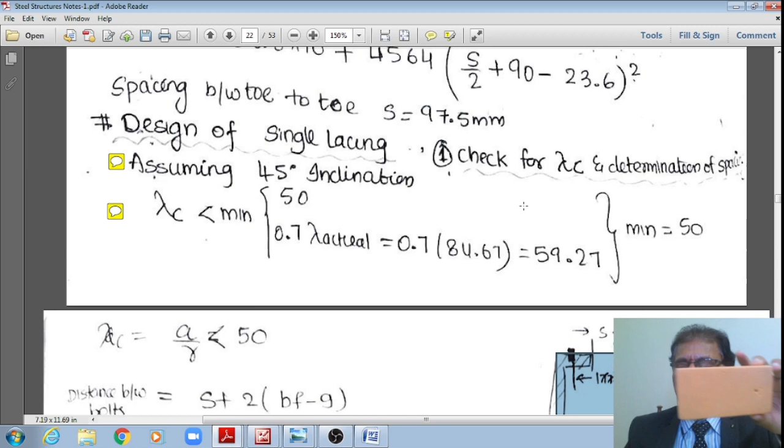Hence, provide a batten plate of overall depth 290mm and thickness of 4mm, and the width is equal to the outer to outer distance between the channels, which works out to 97.5 plus 180, equal to 277.5. So the width is 277.5, the overall depth worked out to 290, and the thickness is 4mm as shown in this figure.

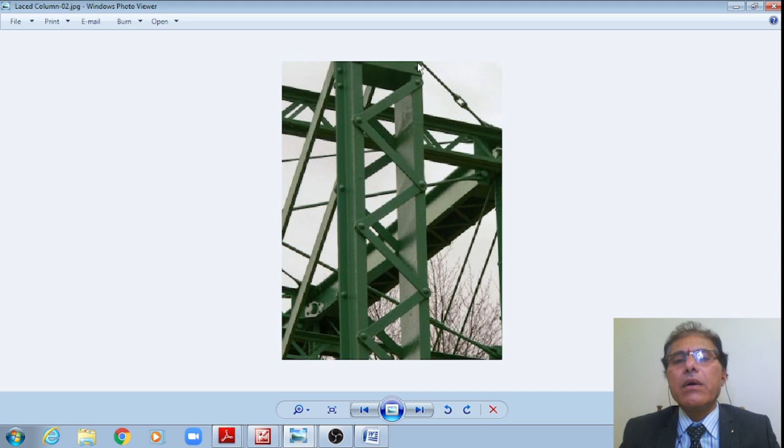Now I am showing this figure once again, as shown in this figure at the top. This is how it appears. Once I conclude this - this is a single lacing system, and at the top we have provided a batten system also.